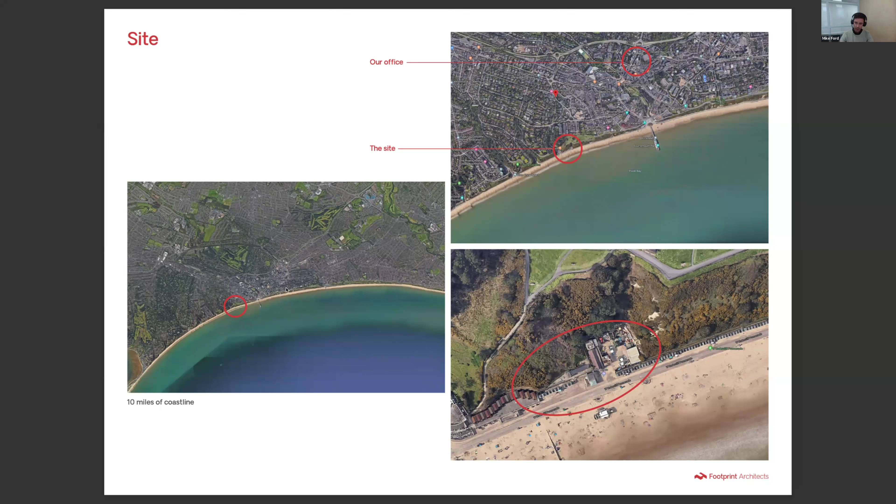We worked with BCP Council and Seascape, the council's work team, on Durley Chine. You can see here the location of the site and proximity to our offices, in fact, which made for quite nice site visits. You can see the kind of location within the entire beachfront between Poole and Christchurch, which shows the location of this site in terms of its proximity and its importance to this beachfront environment.

You can see here, this is the site location. The site itself is actually a waste transfer station, and it collects, it's the kind of deposit really for all of the waste that's collected across the beach. It's brought back to this site, sorted, and then taken away for recycling. So it's a very important kind of sustainable centre for the beachfront.

There was a lifeguard station just on the cliff top, as well as some public toilets and some beach huts in the original site.

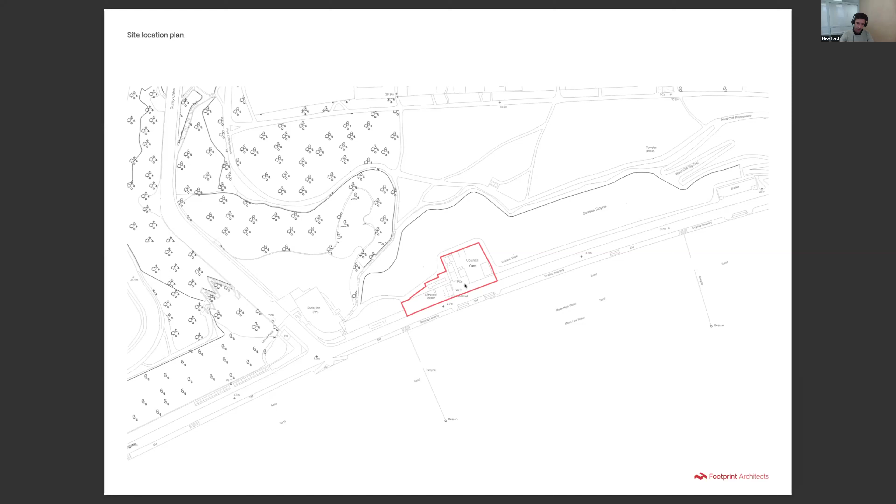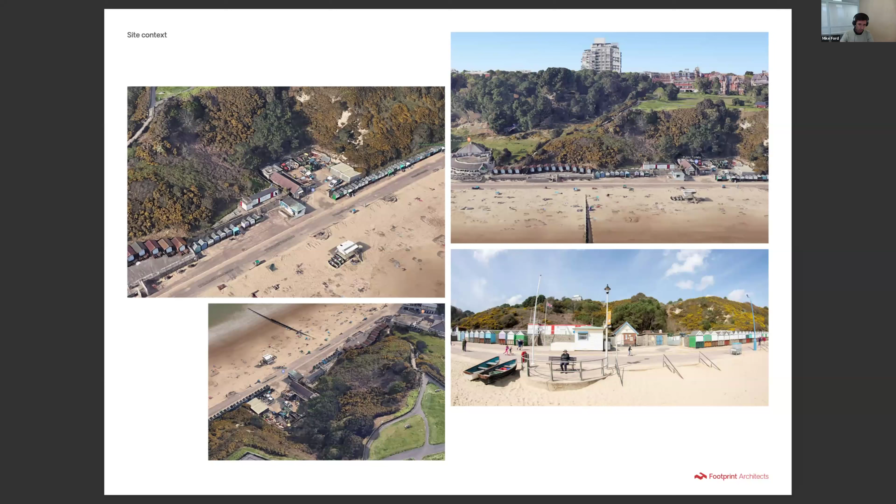And here's just a view out from our centre.

So the real brief for this site was about the huge volumes of litter that are deposited on the beachfront every year, and the council's drive to alter their change in thinking, as well as trying to create change in the public's way of thinking in terms of throwing away litter and keeping the beaches clean.

They wanted to create an improved welfare facility for the people working on the beach, collecting this rubbish and all the other jobs they do throughout the area, as well as educate the public and create a step change in thinking across the beachfront. It also involved replacement of public toilets and kiosk.

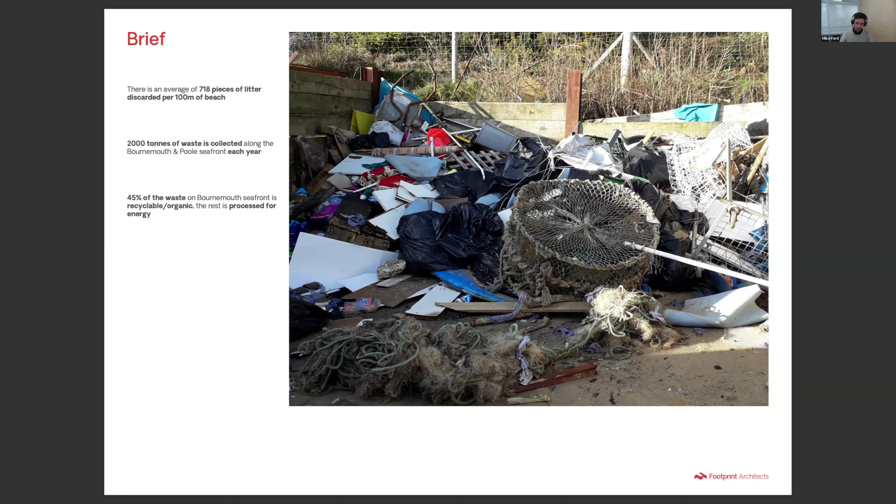This kind of approach really led us to think about waste in a much more key role, and trying to use natural materials, create a sustainable building that really reflected the brief and wore its eco credentials on its sleeve. So that's the kind of direction we wanted to start with.

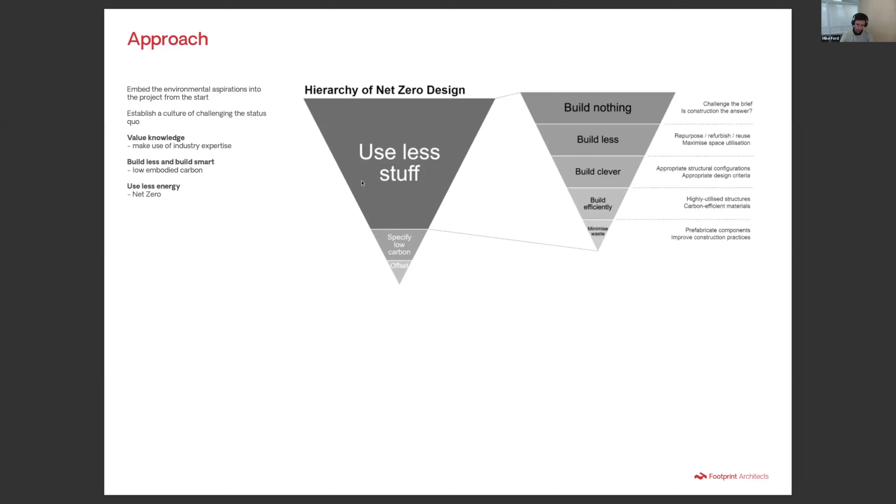This really started getting us thinking about how we approach design, and we wanted to create an overall approach to the process that led our design decision making throughout, from concept forming through to material choices and operational use. It was about doing less and building efficiently.

We really wanted to create this kind of hierarchy of decision making. So every time we had a decision to make in the design process, we would reflect back to our overarching criteria, which would be to primarily replant the space, reduce as much as we could, recover where we can, and then reuse and finally recycle.

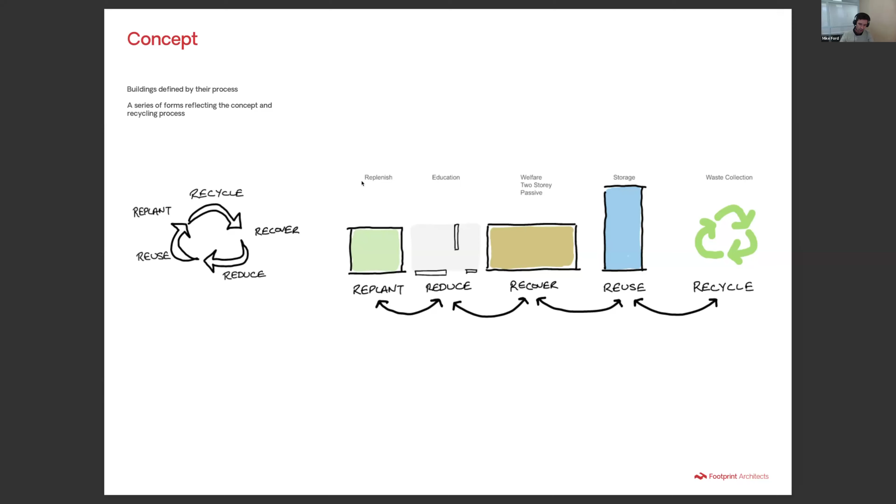We try to apply that process through the concept stage of designing, as well as our detailing and material choices, and also during the construction process. So I'll go through those points throughout these slides, just to give you an understanding of how we ended up here.

The formation of the cliff profile is obviously quite prominent on this site, and it has influenced us quite heavily throughout the design process, as well as the tones of the cliff geology and the sands and the sea beyond.

This kind of natural landscape is really key in decision making, in terms of wanting to work with natural materials, steering away from plastics wherever we could.

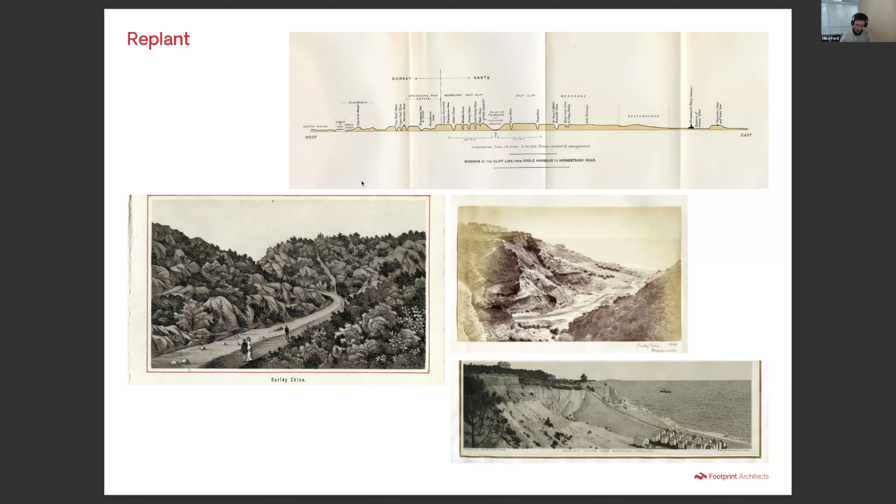You can see here another historic photo showing the waste transfer centre on the right, which has been there for around 100 years, I believe. There are green roofed beach hut structures in the background, which is part of our current site.

You can see the kind of cliff formation, the way it's sloping up from the chine itself, has played a big role in our decision making.

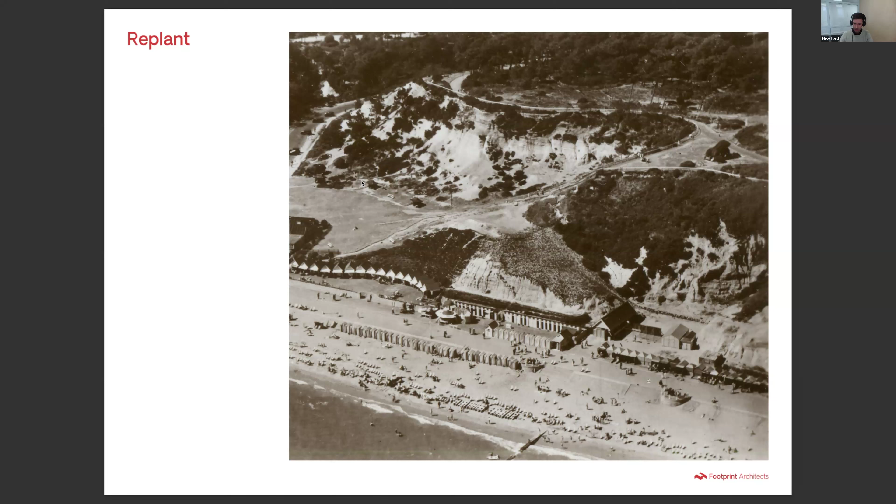So we wanted to respond to these natural formations, and we decided one of the early ideas would be to infill the cliff.

It's kind of an interesting formation where it currently is. We're a bit of a cutout from the cliff, and we wanted to introduce a new form which would infill that space and create a twisting roof to reflect the cliff behind, so that every decision we're making is about responding to replanting. We also wanted to reflect the geology of the cliff behind, and the vegetation that sits along it, as well as respond to some of the human interventions along that front.

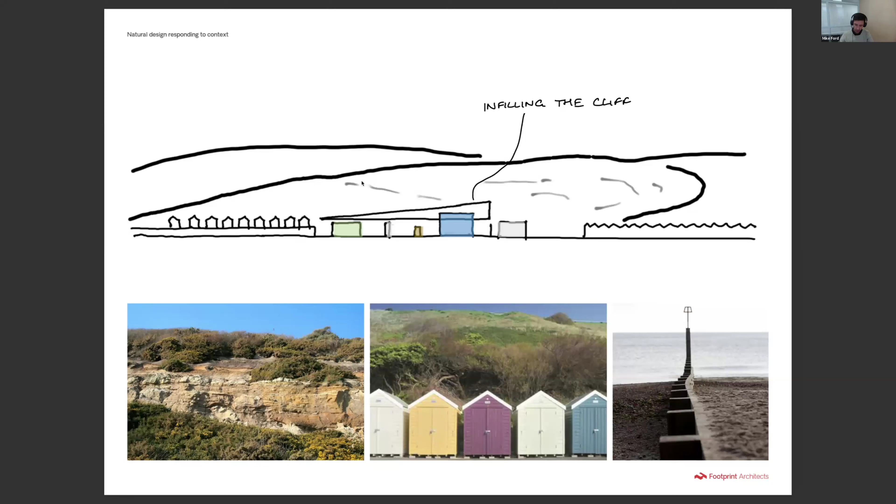So we initially looked at locating areas where we would replant. Where the original lifeguard station was located, we've taken that away and fully rewilded that area to improve cliff stability and the ecology along the cliff top.

We've tried to integrate green roofs throughout the building. This has helped with our sustainable drainage, as well as the ecology of the site. We've also integrated planters and holes in the roof wherever we can, bringing that kind of landscape back into the building as well. Throughout the site, there's also various bat boxes, sparrow boxes, and other ecological introductions.

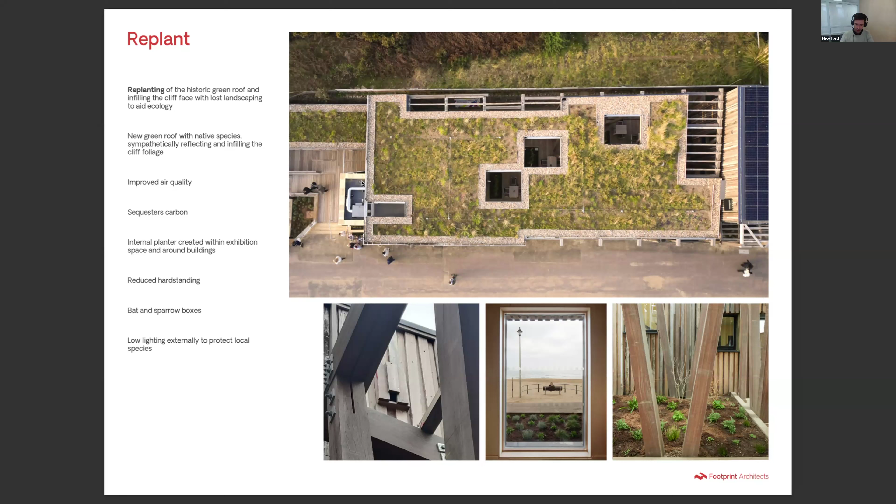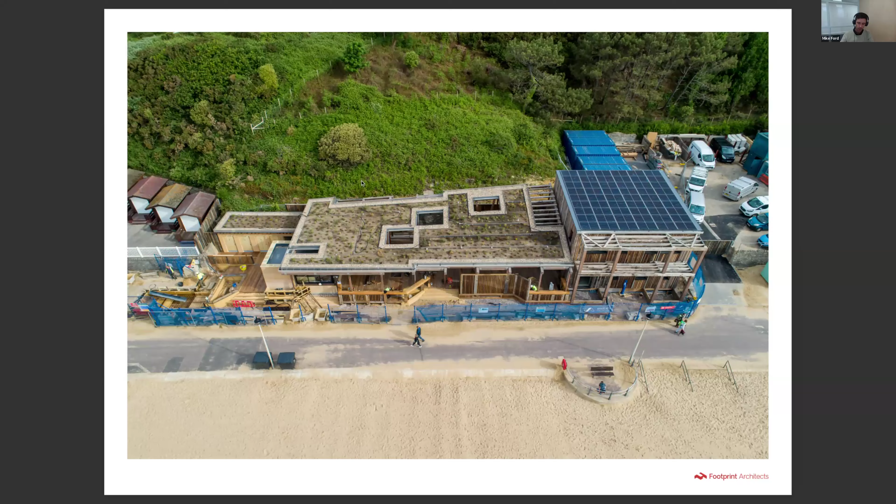You can see here during the construction formation of that roof how it ties into the cliff behind. Again, in context, the twisting roof of that canopy sits in front of the cliff, filling that space. You can also see the tones of the sand and the stratum of the cliff behind, and how that is reflected in the smaller buildings to the left, which are layered up in a toned, low carbon concrete to reflect the geological stratum.

Another priority we looked at was reducing our built interventions. We wanted to reflect the man-made context of the site, primarily small structures like beach huts and small buildings, and how that tied into the priority of reducing. So we broke our concept down into small functions, looking at the individual functions of the brief and working out how we could prioritize these into spaces, so we could build less, improve efficiency, create more outdoor space, and use less material.

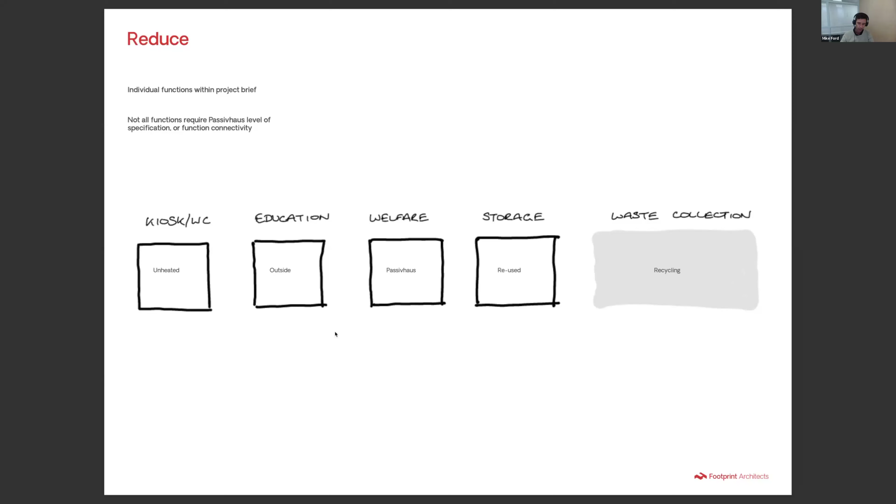We've created 220 square meters of exhibition space which is outside space. This enabled us to build with a lot less material, with less running costs, but also allowed the exhibition space to be an interactive space. It connected with the beachfront more closely, and didn't have a doorway break that would stop passers-by from entering.

The toilets are a single skin structure, so internal and external finishes are the structure, and they're an unheated space. The kiosk has very low energy running costs and is open fronted with radiant heat panels. The education and welfare facilities for the waste transfer centre are a Passivhaus certified structure.

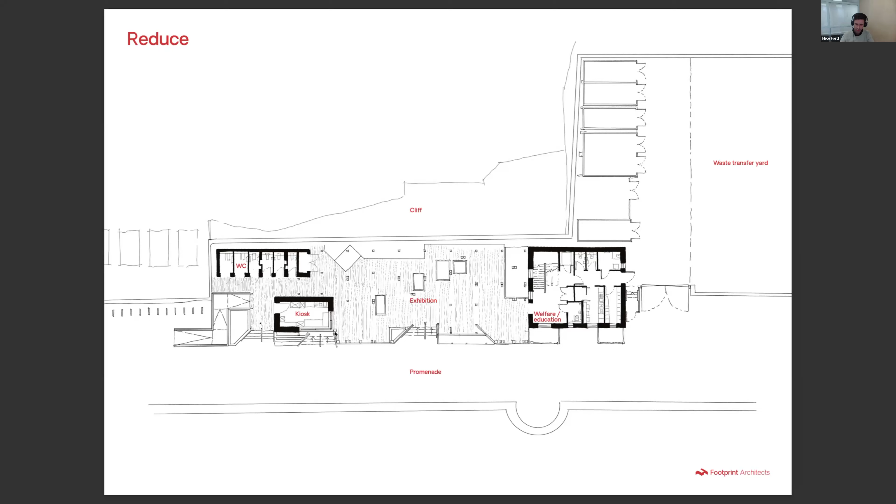These smaller buildings all played a part in reflecting the context of the site, but also enabled us to reduce material use, as well as improving the efficiency of the buildings on site. We also looked at reducing our material choices and using natural materials. We've managed to achieve an A+ rating in embodied carbon. We looked at reducing our site impact in terms of off-site construction, which Seascape will talk about later.

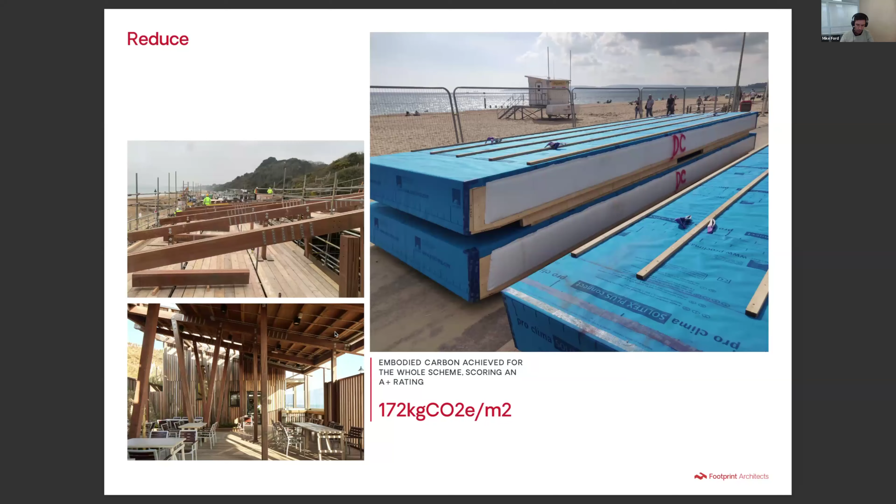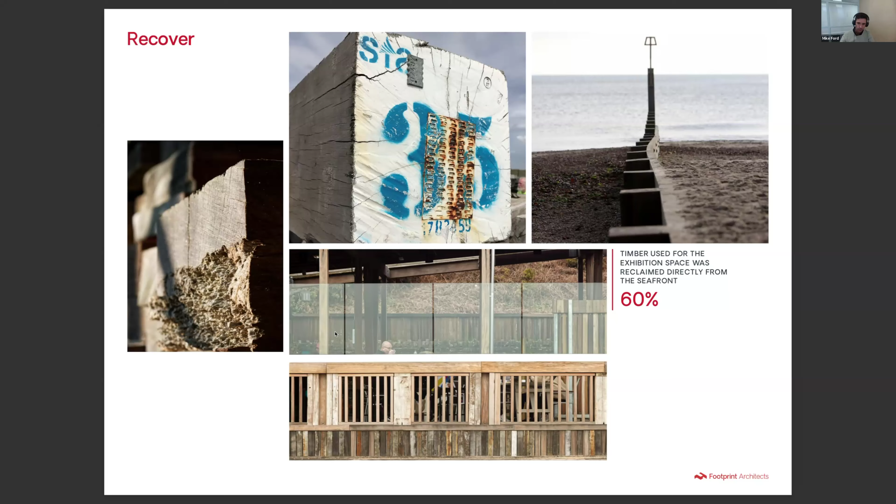These have helped the building really sit within the context and weather instantly. As you can see here, the cladding has been used from offcuts from those groins, as well as formations of bat boxes and the secondary structure of the roof canopy.

Then we turned to recover, to see how we could recover as much as we could, in terms of materials but also in terms of energy. We have a passive house building, which is mechanically ventilated with heat recovery, passive cooling, solar shading and winter solar gains, as well as 90 square meters of PV panels, all designed to achieve a 100% regulated energy use.

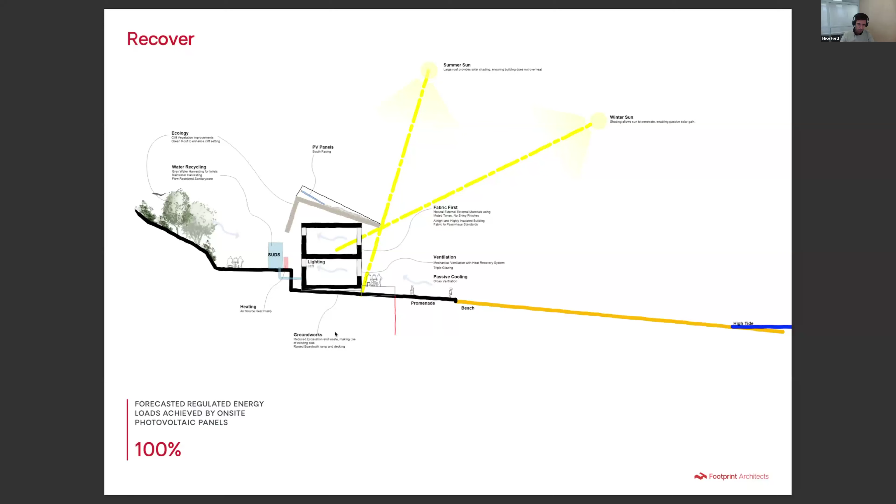Then reuse. There were some elements of reuse throughout the building, where we used secondhand shipping containers for the welfare facilities and storage. But really, this building was about an instigator for beachfront change. It's helped BCP create step changes in their decision making. They've introduced, since this project, water refill stations throughout the beachfront, and kiosks run by BCP have introduced reusable plastic cups, as well as sustainable food packaging choices.

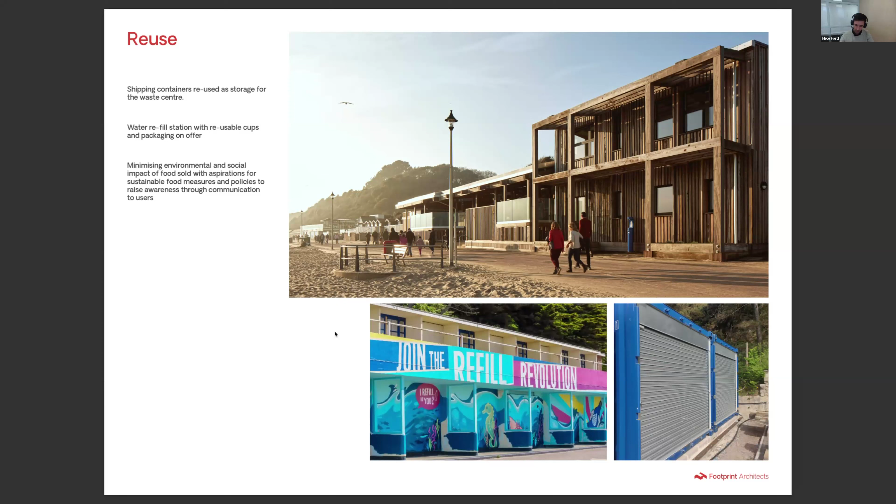Recycling the building at the end was also an important part of this project. We've introduced fixing details, for instance on the canopy, which enable the building to be taken down again in the future, and materials to be reused. We've used recycled plastic bottle tops throughout all of the toilets, and warmcel insulation, which is recycled newspaper, throughout the passive house building, as well as recycled glass in the screeding of the flooring.

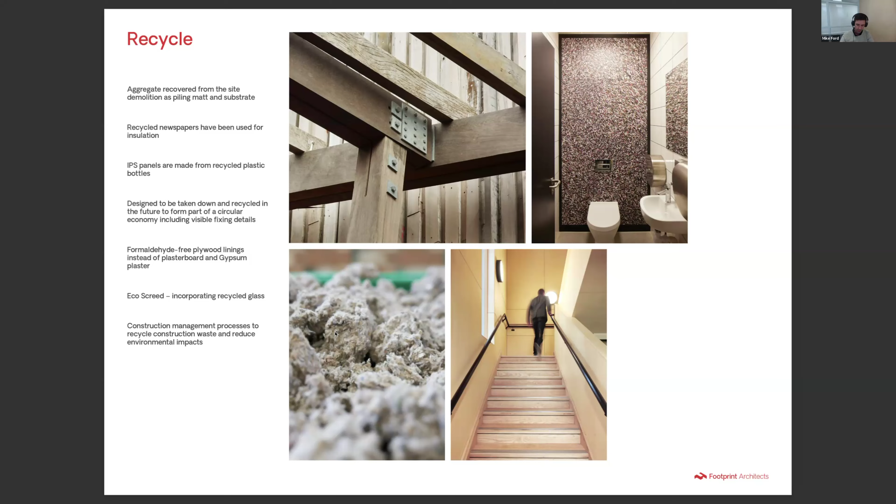And you can see in these photos the detail and context of that reused timber, which helped the building nestle into the background.

Touched on earlier about the geology of the cliff behind, and the response to that was to create these smaller structures out of a layered concrete. These are the public toilets and kiosk buildings. They use a reduced cement content, as well as GGBS replacement, and we developed them to also have hugely reduced rebar, so that we could make them more durable and reuse them in the future.

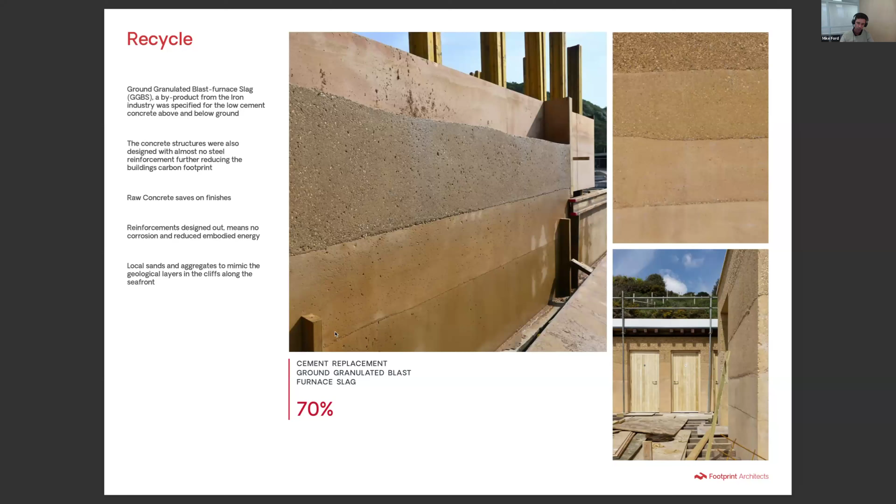The concrete is layered, and each layer is brushed to expose a different aggregate, reflecting the stratum of the cliffs behind. You can see the building there in its context, and again at night. I'll just play a quick little video.

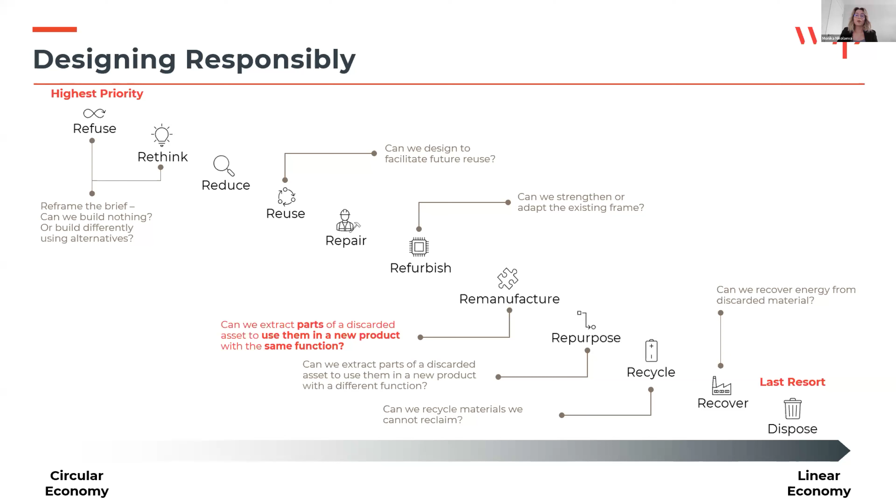We still have a long way to go as an industry to move towards what we call circular economy, and actively challenging every design. The Durley Chine, however, is a shining example of how challenging the client and the brief can lead to more efficient and sustainable design, while maintaining, and I would dare say improving, on the original building functions.

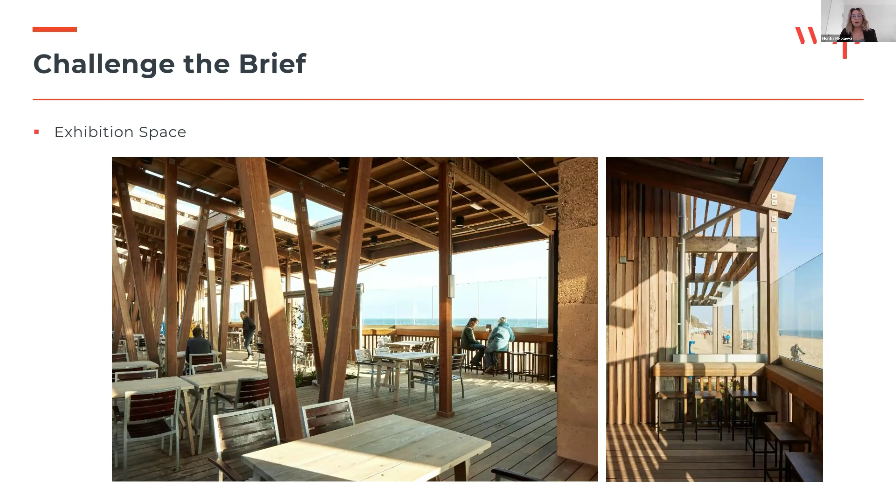Part of challenging the brief was recognizing the different spaces we had, their requirements and intended purposes. For example, the exhibition space was a completely outdoor space with quite a unique canopy design. Then we had the education and welfare building, a two-story timber building designed to passive house standard. The third was the kiosk and toilet space, an unheated, small single-story unreinforced concrete building.

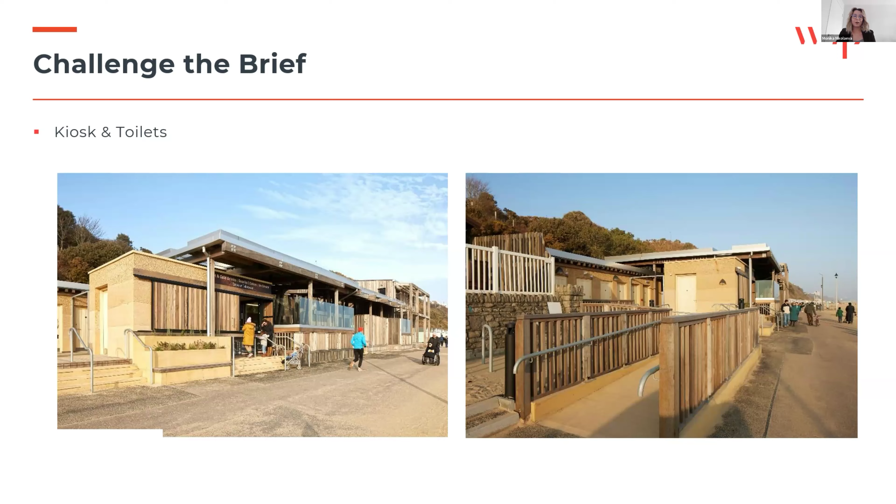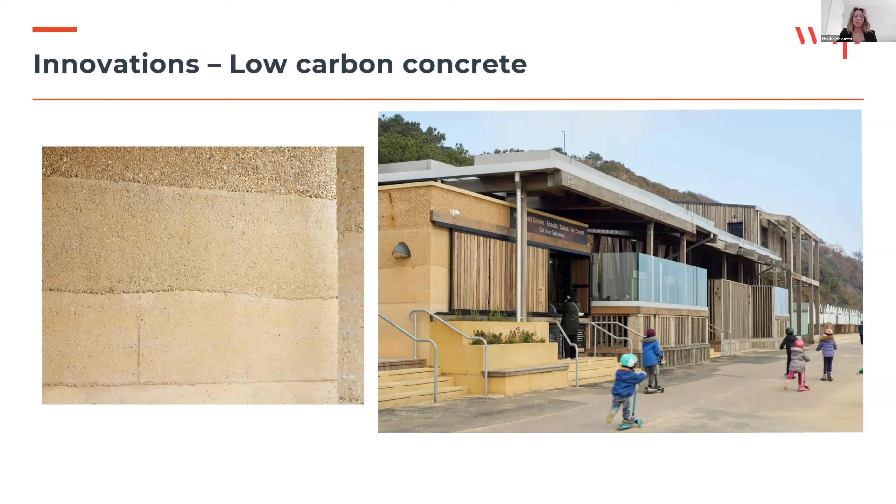As you can see, all of them are quite different from each other. This meant we had to think outside the box and include a lot of innovative designs. One of them was low carbon concrete, which can sound a bit controversial, but it actually did save us embodied carbon. How did we actually do that?

Well, first, we discussed with Footprint Architects the way they wanted the building to match its surroundings, which meant we could use raw concrete and save on finishes. Because of the nature of the buildings, they were not very high, and there wasn't very high loading on them, so we didn't actually require reinforcement, and that allowed us to use higher cement replacement content.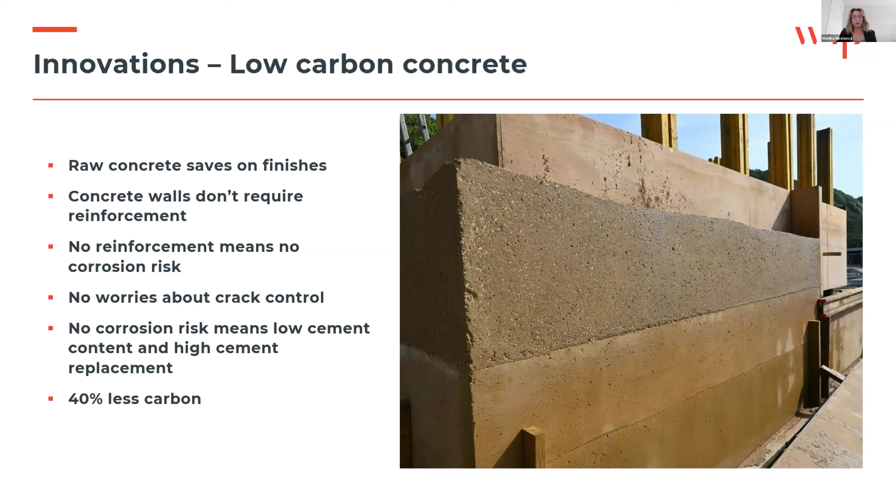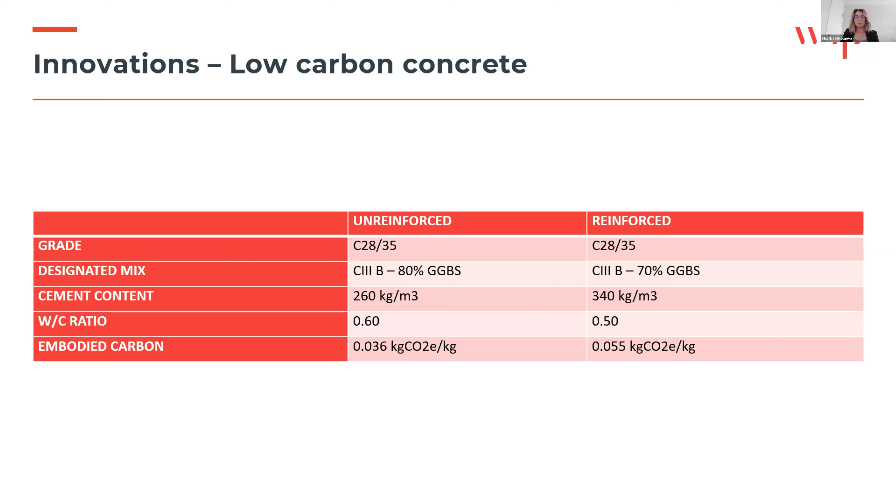In the end, we managed to save 40% of the original carbon just from the concrete walls. This is an example of the difference it made having unreinforced versus reinforced walls, which is something people wouldn't think of initially, but it made sense for this project and worked really well with the high cement replacement content.

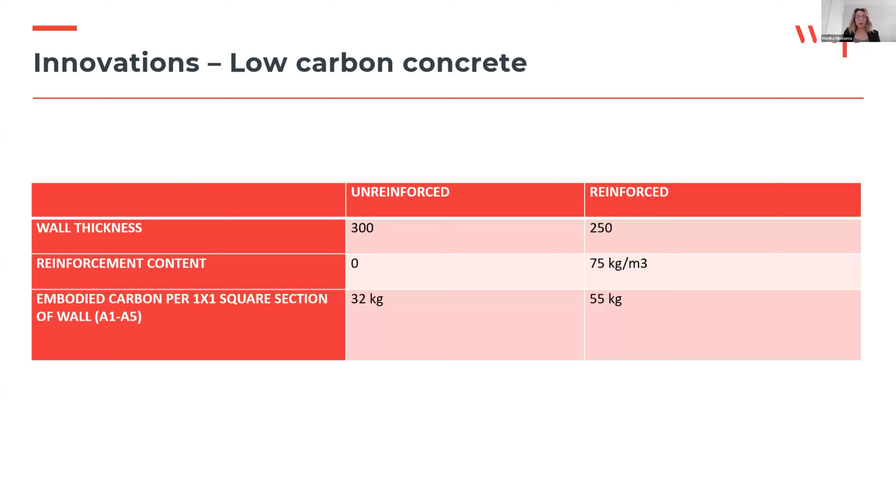Also, something that probably wouldn't be the first idea: we found that having thicker walls allowed us to avoid reinforcement, and also ultimately lower our embodied carbon. We even tried to challenge the foundations. Unfortunately, this was not successful, we still had to have foundations, but it was interesting to see how far we could push the design.

Our biggest innovation was using reclaimed timber. We all knew from the beginning that we wanted timber as our main material. Various approaches were considered in terms of efficiency, but that didn't happen. The team actually came across a large council-managed stockpile of timber groynes just along the beach from the site.

And this set in motion a whole process which actually defined the project itself. The reclaimed timber has been used for the secondary roof structure, brise-soleil, cladding, and decking. The groins are constructed from a combination of Greenheart and Ekki, both durable tropical hardwoods suitable for marine applications, so we knew they had the strength for what we were designing.

We did have issues to overcome with the use of reclaimed timber. We had to develop a very close relationship with Trada, who helped us assessing, selecting, and grading the timber available. Once they knew the length and thickness of the available stock, the design of the canopy and cladding was adapted to correspond to the spans of the wood. The whole WSP team did everything to minimize unnecessary resizing and machining, and ensure as much strength as possible was derived from the groins.

This had its challenges, especially for the hyperbolic canopy roof, where a lot of the members were quite unique in terms of sizing, and we had to design unique connections for every beam and rafter.

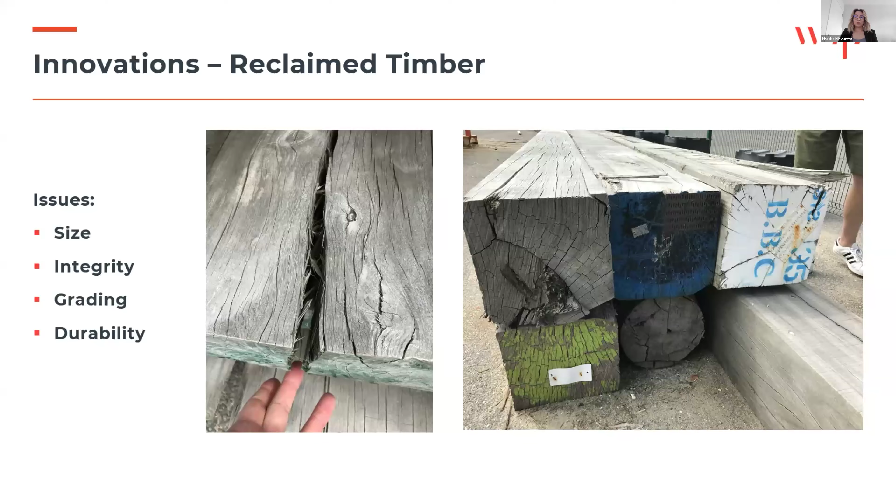Durability was another problematic thing, because how do you actually assess the durability of already used timber? We decided structural components that would be well protected wouldn't have a problem with that—those would be the rafters supporting the roof. But for the primary structure, uprights, and primary roof structure, it was decided to use new timber, which was 100% FSC certified.

Also, we had to keep in mind that Greenheart, which we had here, was toxic to people, so we couldn't risk the splinters—the risk was too high. That's why we used reclaimed timber from Germany for the decking.

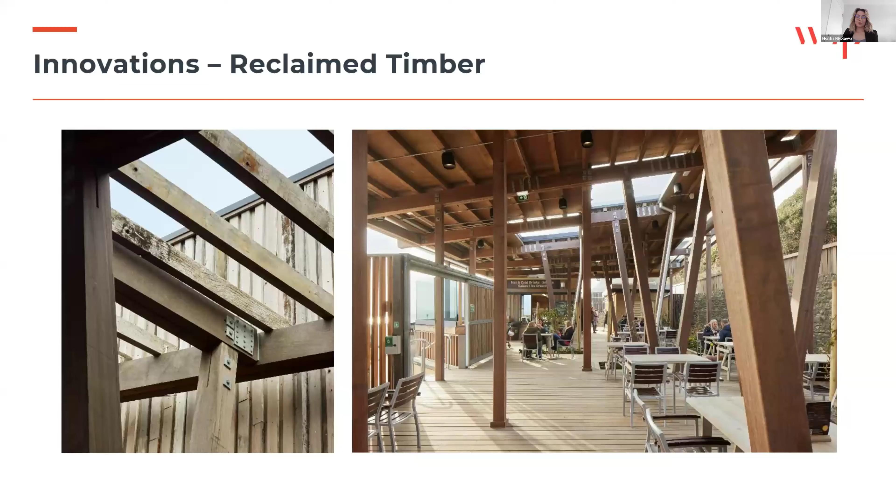It was quite challenging, but a very unique project, which I think ended up showcasing very good collaboration—which brings me to the second theme in this presentation, which is relationships. All of the innovations and changes I've talked about, and all that was achieved throughout the project, was possible because of the relationships we already had or established along the way.

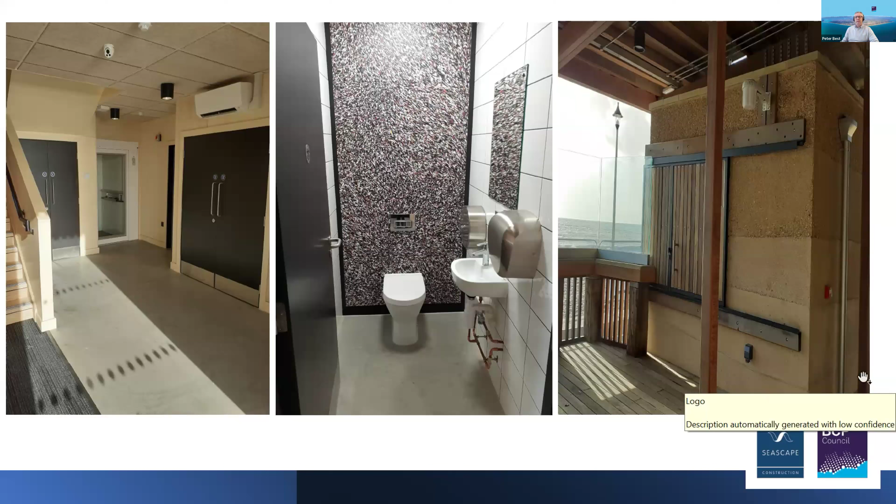Yeah, thanks, Matt, for passing it over. Just before we start on the timber things, there's a few bits there that Mike and Monica have also alluded to with other aspects of the project which are ecologically friendly, that I'll pass on for those.

As we mentioned, the education building was built using SIP panels, and these are the SIP panels arriving on 2 lorry loads. These were manufactured off-site, and on 2 lorries they're craned into place. External walls, internal walls, the floor, and the roof were all installed within 3 days, so it really pushed the program on for us.

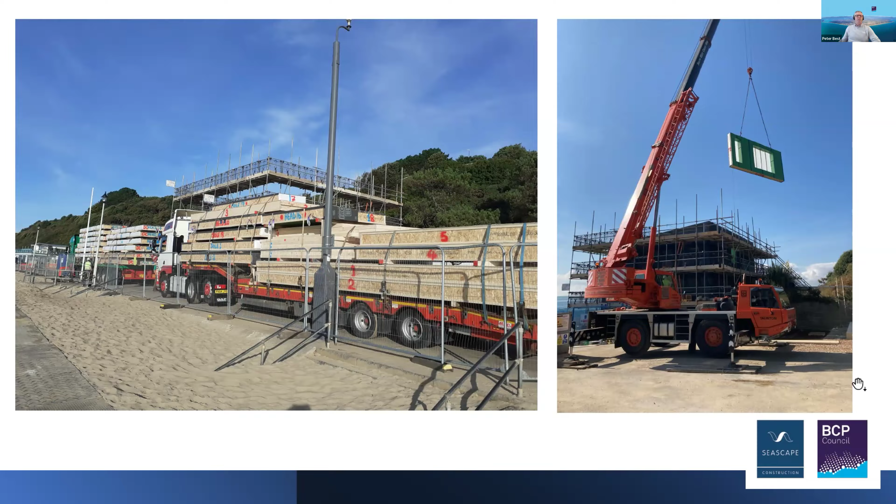The next slide just shows a bit more of the same of the panels being lifted into place.

As has previously been mentioned, BCP has a program of replacement groins over the 7 miles of seafront that we have. The old groins are lifted out of the sea and stored at a location close to within the BCP area, and they're allowed to air dry for future reuse.

This is a mixture of Greenheart and Ekki timber. The strength grading was done by BM Trada, and we weren't able to reuse any timber with metal content or large knots.

All these timbers were collected, cut, and finished by a local timber mill based about 30 miles away at Salisbury, and this was based on a cutting list produced by our own carpentry team.

Just as an example of how much timber we use, Mike gave a tonnage weight of timber, but for another way of thinking about it: for the cladding of the education building was 3,800 meters of timber, for the decking subframe was 550 meters of timber, balustrades, spindles, handrails and posts was another 700 meters, and the louvers for the brise-soleil on the education building was 115 meters. So it just gives an indication of the amount of timber that was reused on this project.

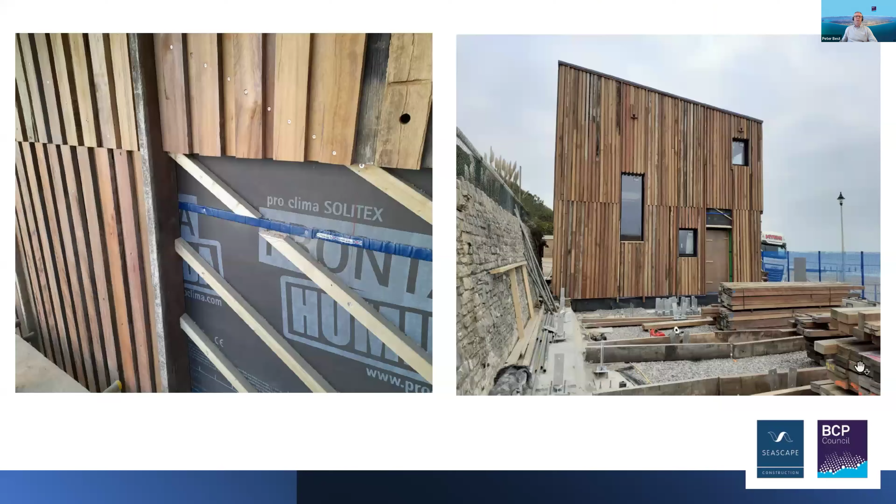These two photographs show the cladding to the education building. You can see it was a castellated form, so you had 150 mil widths of timber fixed to the battens, on top of which were 100 mil widths of timber to get the castellated effect. On the right-hand photograph is the finished effect of the cladding. You can see the two bat boxes at the top of the building, and in the foreground the reclaimed Ekki and Greenheart timber used for the decking subbase, with some brackets shown there as well.

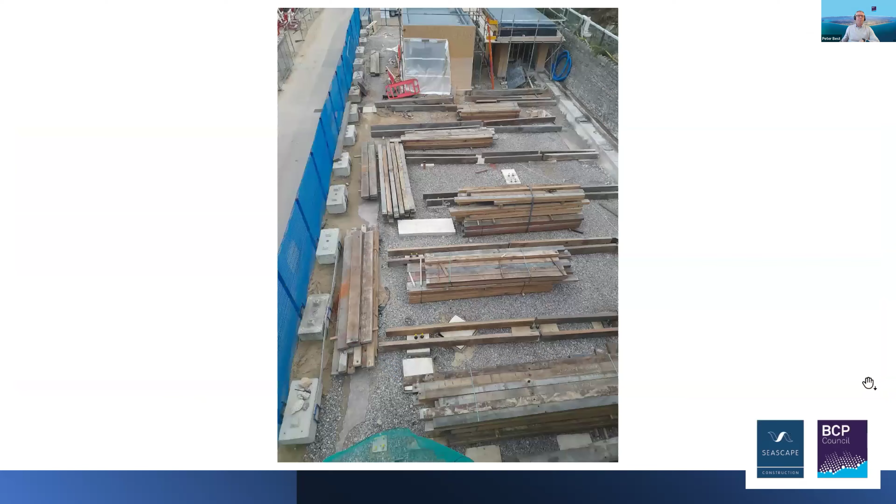This is the view from the education building of what's going to be the decking area and the canopy, again just showing the amount of timber that was reused from groins to be used for the subframe of the decking area.

Now onto the canopy, which is probably one of the most complex aspects of the project. We sourced the timber through a timber merchant in London, who in turn worked with a company in Holland called Hupkes, now called Wijma, and these are some of the drawings they produced for us as part of their work. Numerous Zoom calls were made between the merchant, Hupkes, footprint architect, and WSP, to ensure that what we had delivered to site was a one-stop shop. We did not have the time, bear in mind these timbers were machined in Holland and sent over, to get any replacement timbers if anything was wrong.

This 3D image that we were able to get from Hupkes was extremely useful to our site carpentry team, who wholly undertook the erection of the structural beams and posts of the project.

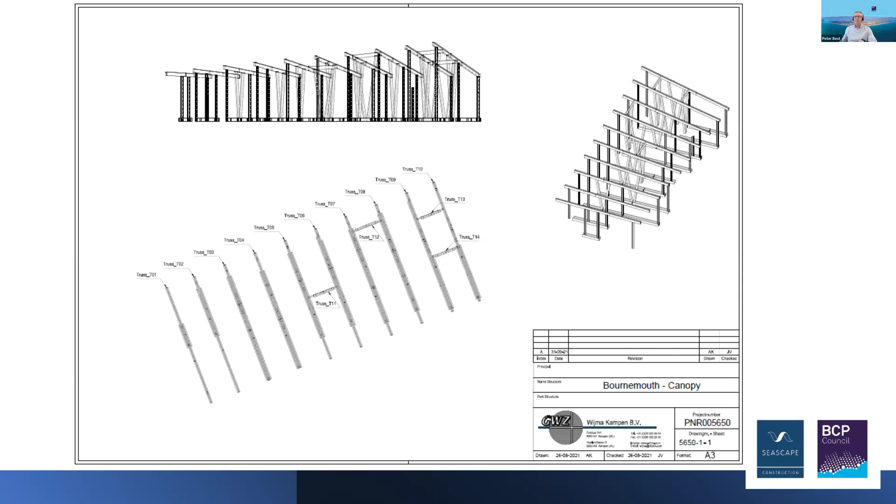These are the timbers that arrived newly on site directly from Holland, structural FSC Ekki. Just note the precise location of the bolt holes and the milled grooves in the timbers.

We did look into the possibility of using reclaimed timbers for the structure, but BM Trada were unable to provide assurance of either structural integrity or longevity of any recycled groin timbers for this element of the works. These were the only new timbers used in the whole of this project.

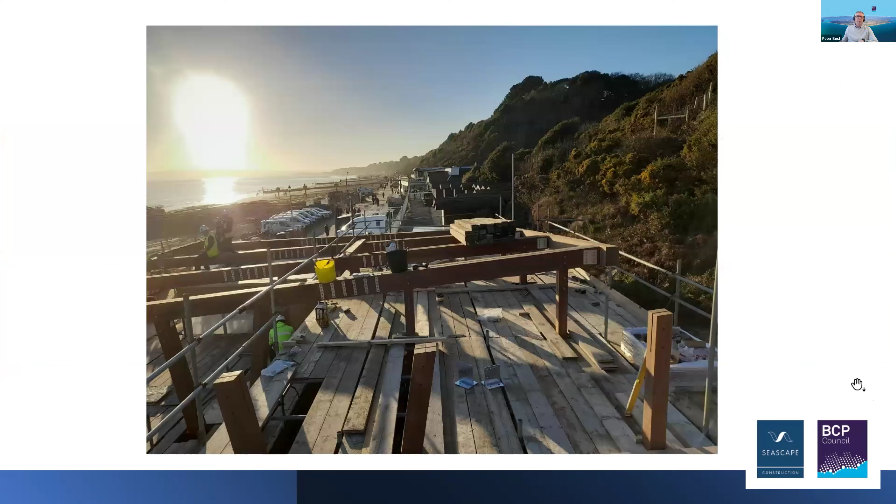A view there of this lovely sunny Bournemouth. The sun always shines in Bournemouth, so they say - not quite true, but this also shows the view down towards Sandbanks, Millionaires Row. Photograph taken from the roof, and you see the rake of the roof with the structural timbers, as Mike alluded to earlier.

And it was the number of fixings that were needed to hold all this framework together.

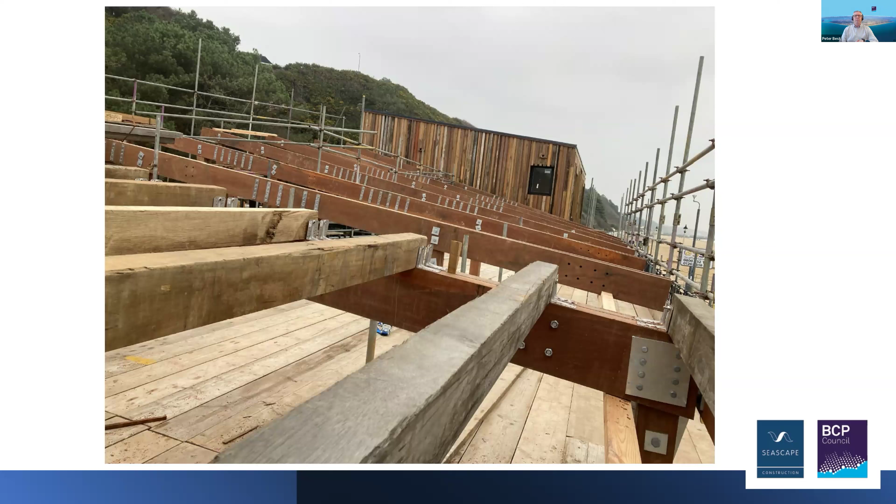Another view there, this is looking towards Bournemouth Pier and beyond towards Boscombe, looking the other way on the roof. And again, just emphasizes the rake of the roof up to the top corner. In the foreground is reclaimed timber groins used as purlins.

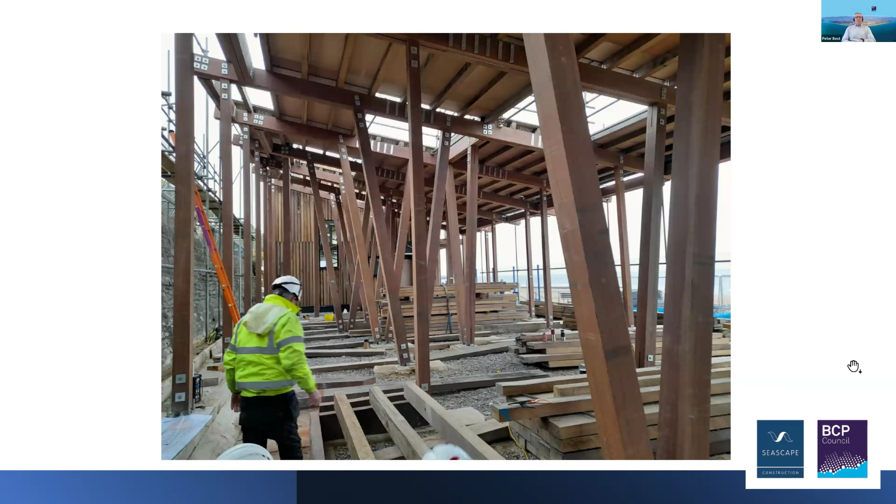This is a view from underneath the roof onto what would end up being the decking area. Note the V sections of timbers - these were solely individuals with very, very minor degree differentials between them. They had to be in the right place, otherwise the frame would not go together.

Over the whole of the span, there's a 20-meter span widthwise of this canopy. There was a 1 millimeter tolerance over 20 meters. It all went together, and we only needed to use one sledgehammer to drive in one bolt. It was a few sleepless nights, but it went together.

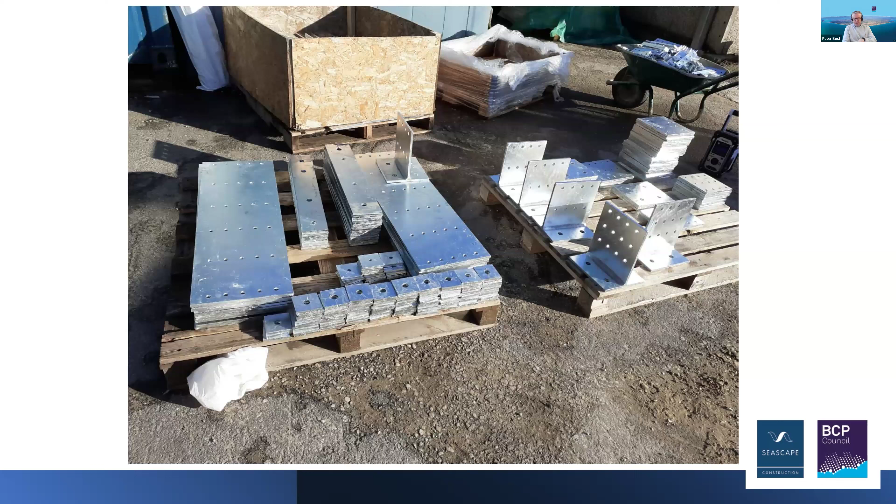These are just some of the galvanized steel fixings that were produced for this project, produced locally in Poole. We had the combination of the timber being milled and machined in Holland and the brackets being produced in Poole, so we sent a sample of each bracket over to Holland, and from that they used it as a template to machine the timber.

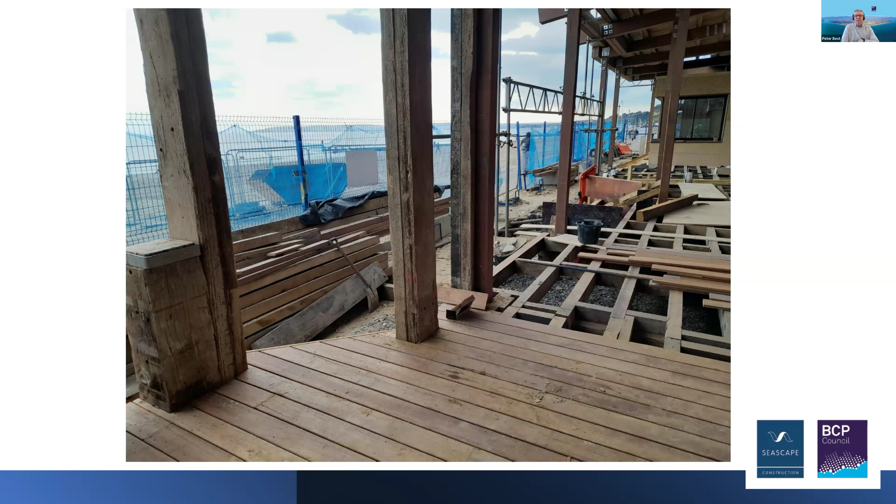It shows the timber decking has been previously mentioned. This was reclaimed timber from a naval shipyard in Germany - this is Basralocus. Again, this was all machined and milled in Holland.

Also note the old groins that were used as posts for the balustrade to the front of the project. And again, as seen here from the outside looking in.

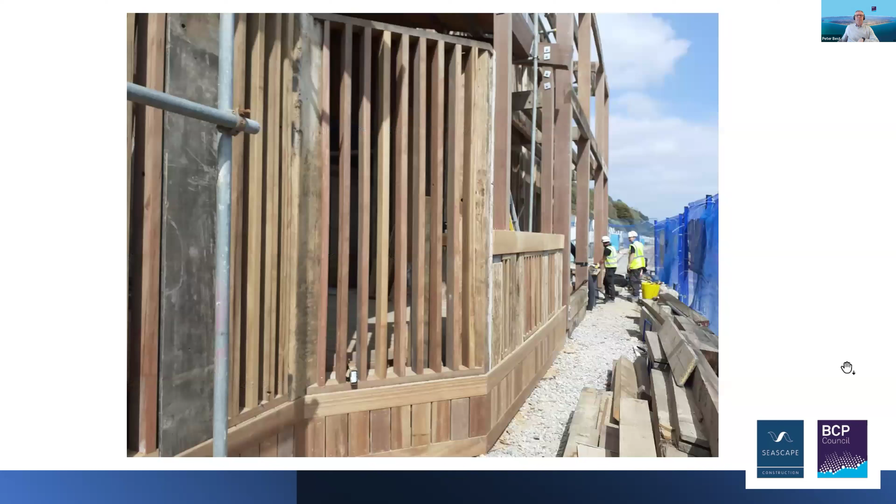This point just shows the complexity of the location of the project on a seafront location. Obviously, paramount importance was to make sure that the public had safe and easy access across the front of the site, but it certainly showed up its complexities and difficulties.